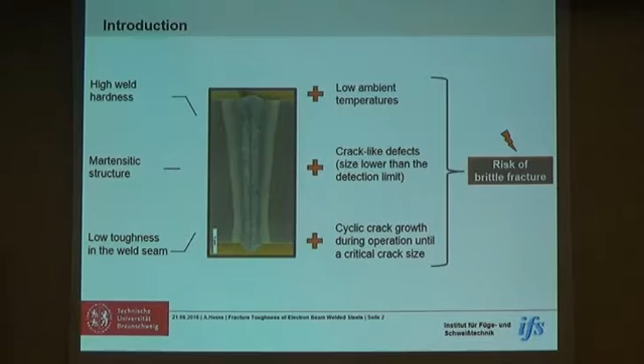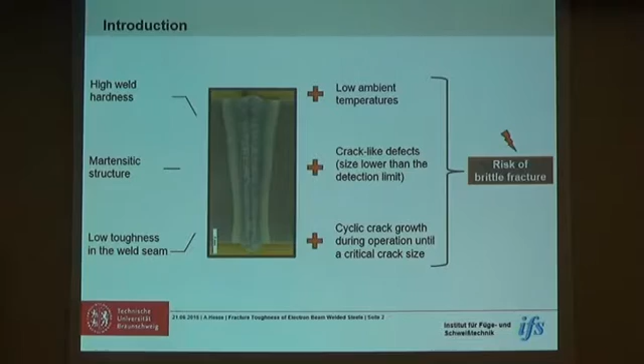Due to cyclic loading during operation until it reaches a critical crack size, there is a risk of brittle failure for these components. We are not the first ones to think of this scenario; it has been used as a scenario for standards, especially in the Eurocode 3, part 1-10, which is a guidance for the selection of steels taking into account fracture toughness. It has been verified for base metals and arc-welded components.

One central element that they use is a correlation between the toughness taken from Charpy energy values and the T0 temperature from the fracture toughness master curve, known as the fracture toughness reference temperature. The Sanz correlation reads as T0 is T27J minus 18 degrees, and depending on the literature you use, you find either 1 sigma or 2 sigma deviation, with sigma being roughly about 13 degrees. And we asked ourselves, can the Sanz correlation be used for electron beam welded joints as well?

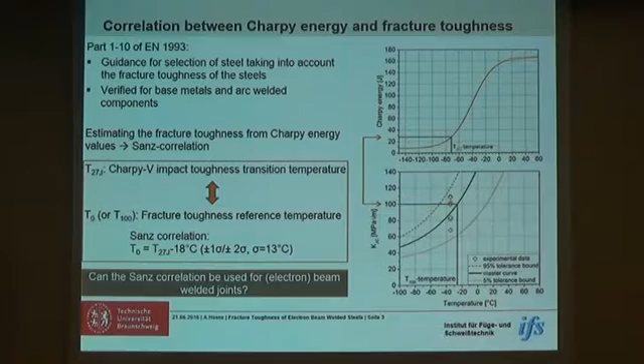For our research, we used 3 different steel grades. The lowest yield strength was around 355 megapascal, going up to 960 megapascal. They were electron beam welded with a voltage of 120 kilovolts, a beam current of 35 milliampere, a welding speed of 10 millimeters per second, which is rather fast compared, for example, to arc-welded specimens. The sheet thickness was 10 millimeters, and we recorded temperatures during welding, and the t8/5 cooling times from 800 degrees to 500 degrees could be determined to be 1.6 seconds.

After welding, we took cross sections perpendicular to the welds, and we made a hardness measurement on the surface of these cross sections. You can see the results in this figure, and it could be shown that the hardness within the weld seam exceeded 400 Vickers, and in the base material it was dependent on the base material, of course, and we have a relatively high mismatch ratio in the S355 specimen between the hardness in the weld seam and the hardness in the base metal.

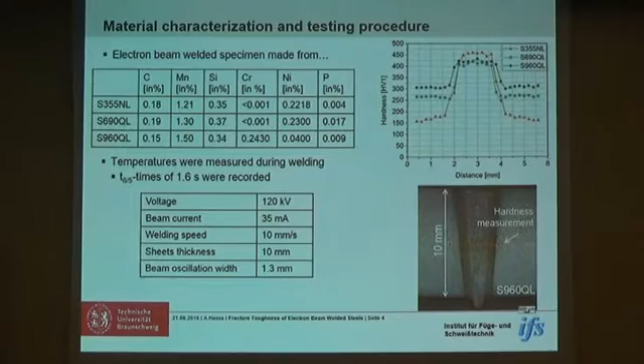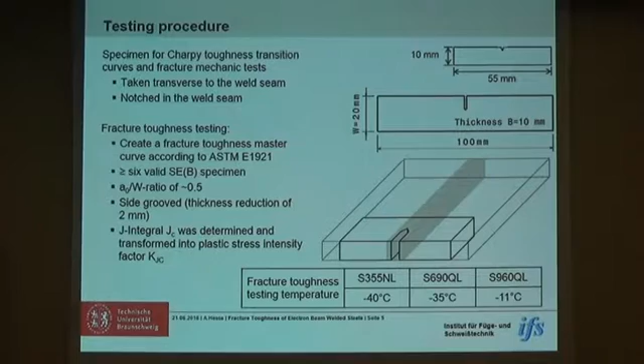For our tests, we took the specimens transverse to the weld seam. They were all notched in the middle of the weld seam, and the fracture toughness testing was done to create a fracture toughness master curve according to the American standard E1921, which needs at least 6 valid specimens. We chose a ratio of the initial pre-crack to the specimen height of roughly 0.5. The specimens were side grooved after pre-cracking, and the J integral was determined and transformed into the plastic stress intensity factor KJC.

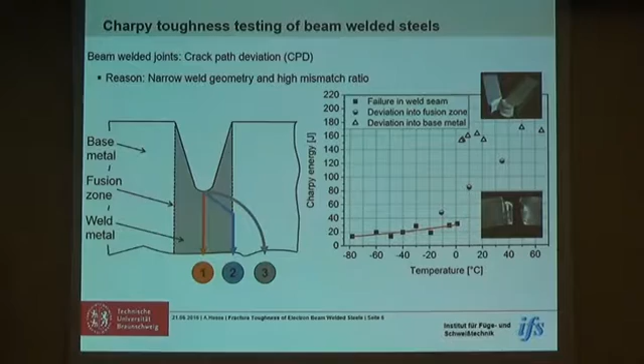If we think of Charpy toughness testing of beam welded steels, we shortly have to discuss that they behave differently compared to arc welded specimens or base metals. We have basically 3 failure patterns that usually occur. The one failure pattern which gives us information about the weld seam itself is a brittle fracture within the weld seam. And with rising temperatures, we usually can determine crack path deviation either into the fusion zone or into the base metal. The reason for this behavior is basically the relatively narrow weld geometry and the high mismatch ratio of the hardness between the weld seam and the base material.

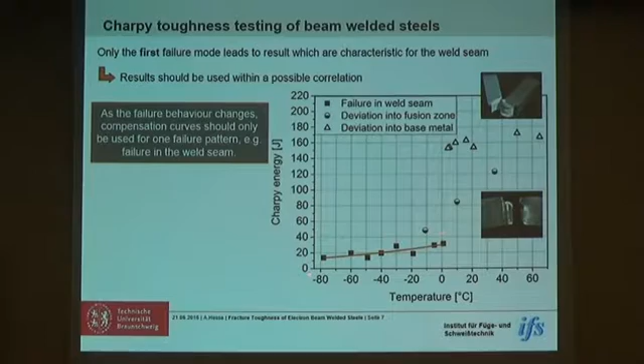As we want to connect the behavior of our beam welds, we chose only the specimens that failed with the first failure pattern, because those are the only ones that give us information about the weld itself. And as the failure behavior changes, it is difficult to use the normal compensation curves which have a sigmoidal slope. So we use compensation curves for the specimens we chose for our correlation.

If we have a look at the experimental results for the Charpy toughness transition curves, it occurred that we weren't able to detect the brittle fracture within the weld seam for the S355 welds. We saw crack path deviation into the fusion zone even at relatively low temperatures. In case of the S690 and S960 metals, we were able to determine failure in the weld seam itself. So we can speak of an intrinsic T27 value that could be determined.

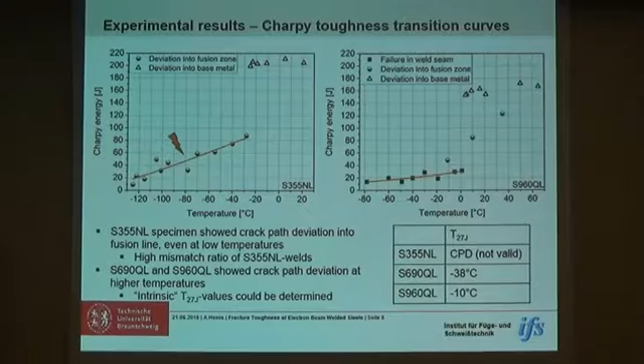This table summarizes the values we found. So for the S355 specimens, we had crack path deviation even at relatively low temperatures. So the T27 temperature isn't valid for our correlation. The temperature that was estimated for the S690 was minus 38 degrees, and for the S960 it was minus 10 degrees Celsius.

The fracture mechanics tests showed that all the specimens failed within the weld seam, so we didn't see any crack path deviation. We could ascertain the reference temperature T0 for all the 3 data sets. And if you compare this reference temperature with arc welded steels or base materials, they are relatively high.

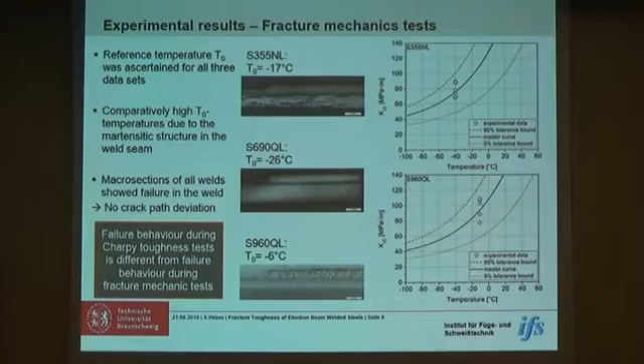A first conclusion can be drawn that the failure behavior during the Charpy toughness tests is different than the failure behavior during the fracture mechanics tests. So we cannot take one macroscopic failure pattern which occurs in the Charpy toughness tests and predict the macroscopic failure behavior for our fracture toughness tests or for welded components.

If we look at our results in terms of the Sanz correlation, we have here the T27 joule temperature and the T100 temperature in our diagram. This dark gray line shows the Sanz correlation, and that should be the line where we would expect our results to be if the Sanz correlation could be used for this kind of steels.

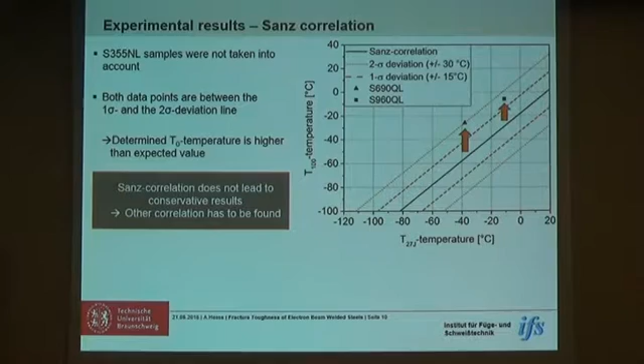We could use the data points for the S690 and S960 in this kind of correlation, and we can see that the determined T0 temperature is much higher than the expected value. We have values between the 1 sigma and 2 sigma deviation lines. That shows that the Sanz correlation does not lead to conservative results in our case, and another correlation has to be found. As we don't have that many points, we weren't able to find a correlation yet, but that is part of the research that is going on right now.

To sum it up, we can say for the Charpy toughness test that the sigmoidal compensation curves, which are usually used, aren't suitable due to the change in fracture behavior, and that the high mismatch ratio of the S355 welds led to crack path deviation even at relatively low temperatures, which means we couldn't find an intrinsic toughness value with the help of the Charpy toughness tests, and we couldn't use it in the Sanz correlation. The fracture behavior showed us that the macroscopic fracture pattern, if we speak about crack path deviation, cannot be transferred from the Charpy V specimen to fracture mechanics specimens.

And if we regard the question whether the Sanz correlation is suitable for the beam welded steels, we can say it could be applied to the investigated S690 and S960 welds. It surely isn't applicable for welds with high mismatch ratios, and as it doesn't show conservative results, another correlation has to be found.